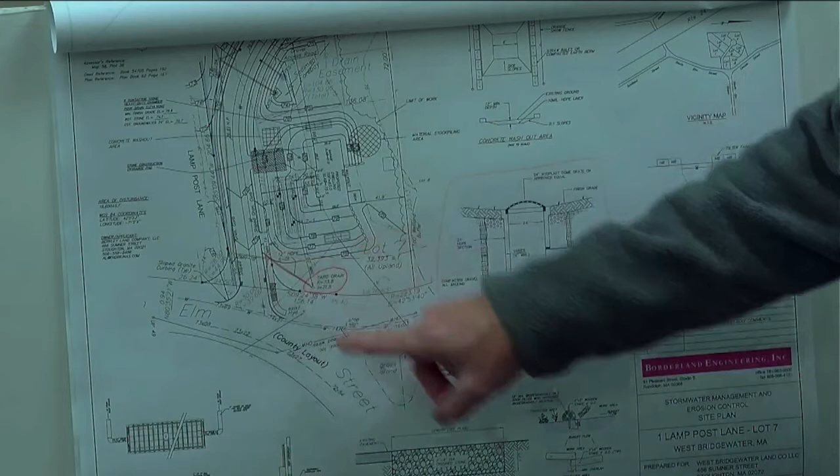The revision we were asked to make at the last meeting was to add a yard drain, which we did, to take care of a low point in the yard towards Elm Street, the hydrant area out there, the existing hydrant, which always collected some standing water during heavy rainstorm events. So we added that yard drain and piped it to the drainage system for the subdivision.

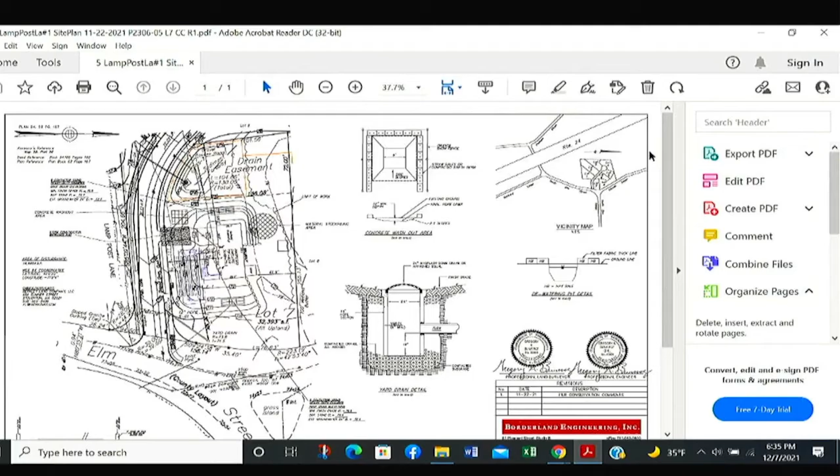In case the audience can't see it, this is the yard drain that they're referring to. That area puddled up, and they've taken care of that now. I think that was it on that one, right?

John, anything to add? No, I'm satisfied. Does that water go down back to the drain easement? Yeah, it eventually makes its way to the drainage easement, through the drain system. Yes, yeah.

Anybody in the audience, questions, comments? Hearing none, I'll entertain a motion to close the hearing. Motion to close, second, moved and seconded. All those in favor? Aye.

I'll entertain a motion to issue a general stormwater management permit for the single-family home for lot 7. I'll make that motion. I'll second. Moved and seconded. All those in favor? Aye. So moved. Then we have number 6.

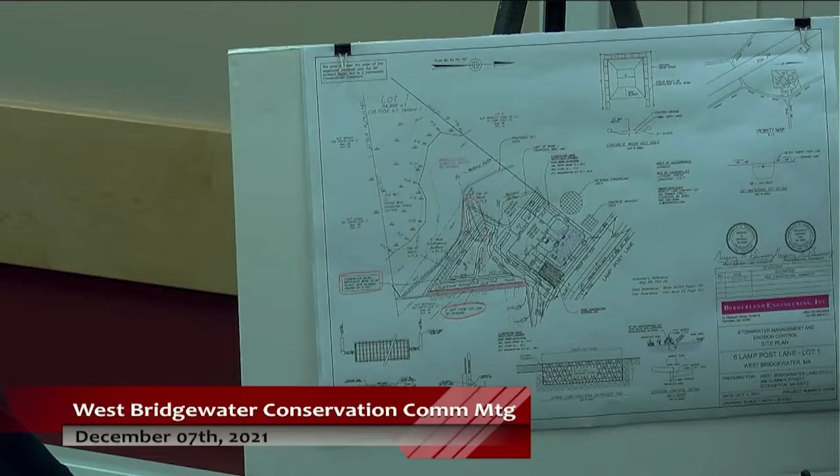John, anything to add? Nothing, I'm satisfied. Any questions, comments from the audience? All right, hearing none, I'll entertain a motion to close the hearing. Motion to close. Second. Moved and seconded, all those in favor? Aye.

So moved. I will entertain a motion to issue a general stormwater management permit for number 6 Lamppost Lane, Lot 1. Make the motion. I'll second. Moved and seconded, all those in favor? Aye. So moved.

And next, we have number 14, Lot 3, Lamppost Lane. Which one are we doing, 14? Okay.

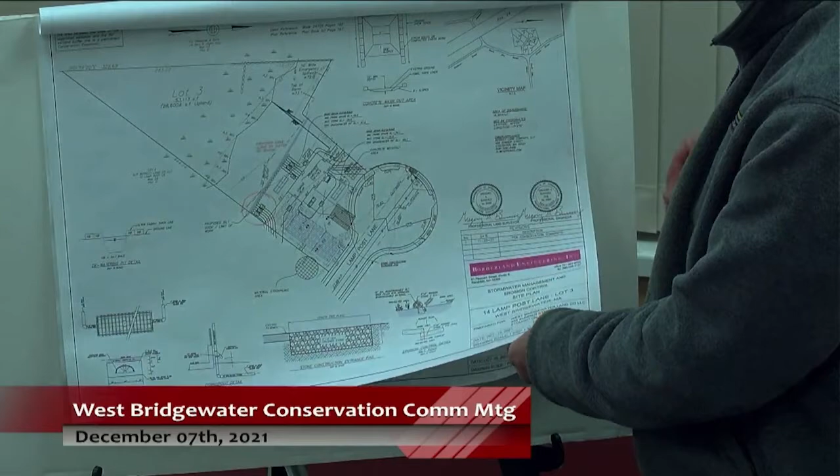John, do we want to go on to 11 Jewel Drive? Or, Evan, are you in the meeting yet? Yes, I'm back. You want to go back to 506? Okay, yep, if 506 is ready, we will. Can you present? Yes, I can. All right, might be easier for you to do it. No problem.

John, do we need the lights off? Go ahead and open the hearing and I'll get this stuff ready. It was opened. Oh, okay, didn't we? Very good. Didn't we already open it? Yes, I think so.

Okay, very good. Well, for the record, it's Evan Watson with W Engineering. I'm representing the applicants, Charlie Macy.

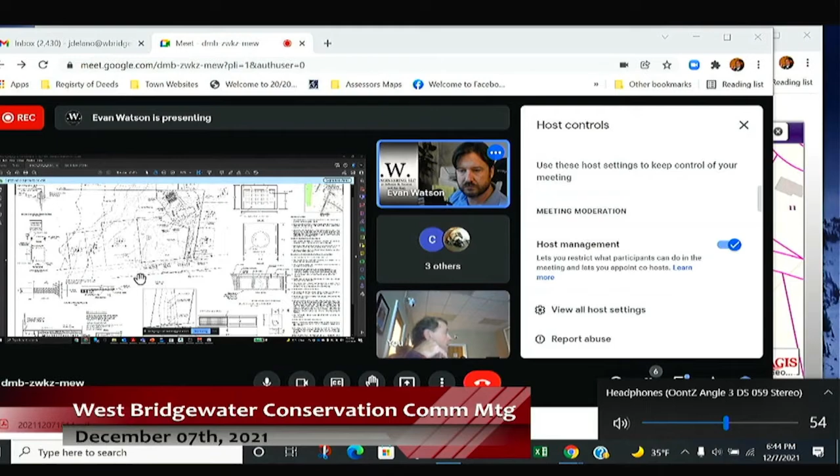I'm going to turn the volume up a little bit. All right, it looks like we're sharing now. Everybody see the plan on the screen? Not very well. Let me try one more thing. Was that better? No. I think if you click the X on the host controls, it might make the screen a little bigger. Like on the big white box that says host controls, there's an X, top right corner. That didn't help very much. Usually there's a full screen mode. Where can we do a full screen? Try the three little dots at the bottom near the hang up button. Yeah, we do have full screen. Can you see that okay? Wait a minute. There we go, a little better. Thank you, that's better. I do a lot of Zoom meetings.

So is that working out? Why do we have these though?

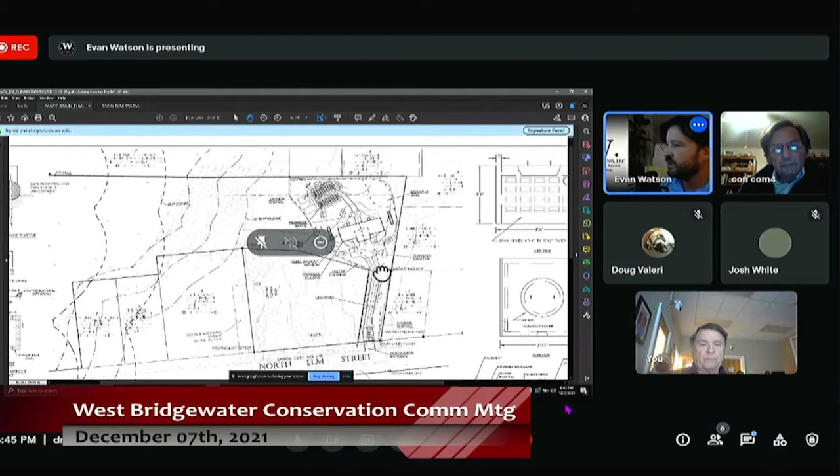We have a proposed duplex and driveway with North Elm Street. The wetland resource area is all the way over to the west, so the entire site is outside of the 100-foot buffer zone. We have a two-family home, each unit with its own septic system in the back, and then a shared driveway coming down to North Elm Street.

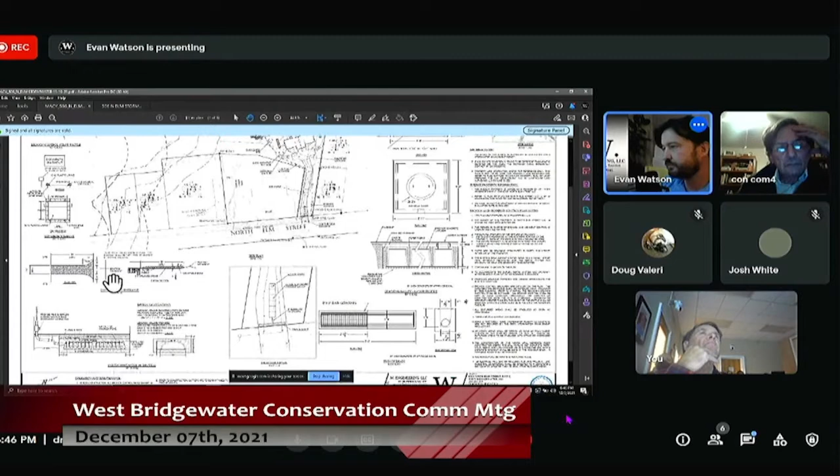We're applying for a stormwater management permit. I'm showing BMPs during construction of some straw wattles, concrete washout bins, and a construction entrance. Post-construction, we have a roof infiltrator with a Cultec 100 drywell, so each side will get drywell. For the driveway, we didn't have too much room on this lot, so we went with a trench drain across the front and leaching galleys underneath the driveway. I presented drainage calculations showing the piping, and the storm I used was the 50-year, one-day storm, as in your regs.

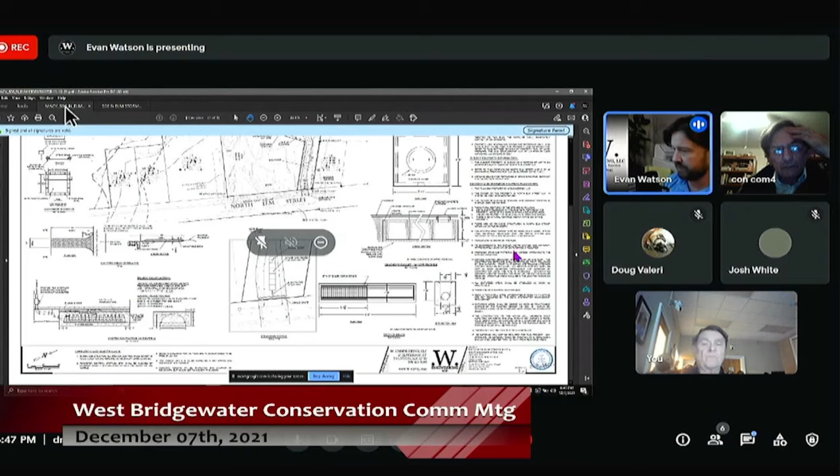I'd be happy to answer any questions if anybody has any.

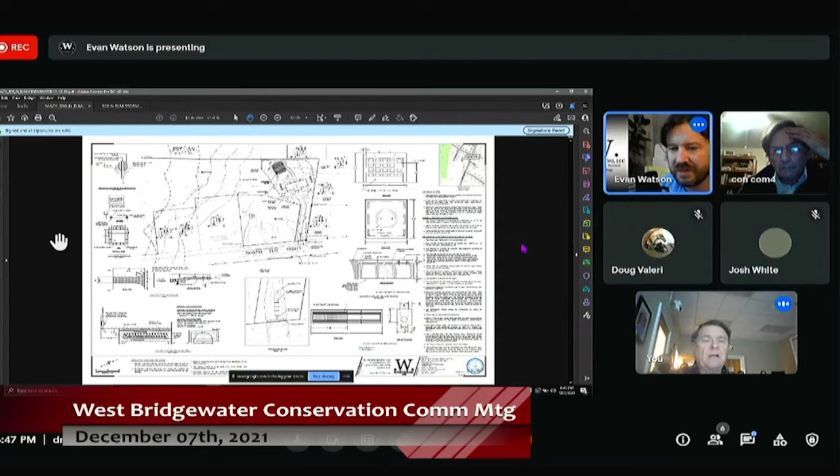Wait a minute. I got it. How do I minimize this thing? Press escape on your keyboard. There you go, thank you. You're welcome, you're hired, can you come every Tuesday? Up at the top, other way. Oh, it's number one, we skipped it. Second one down, third one down. There it is, okay.

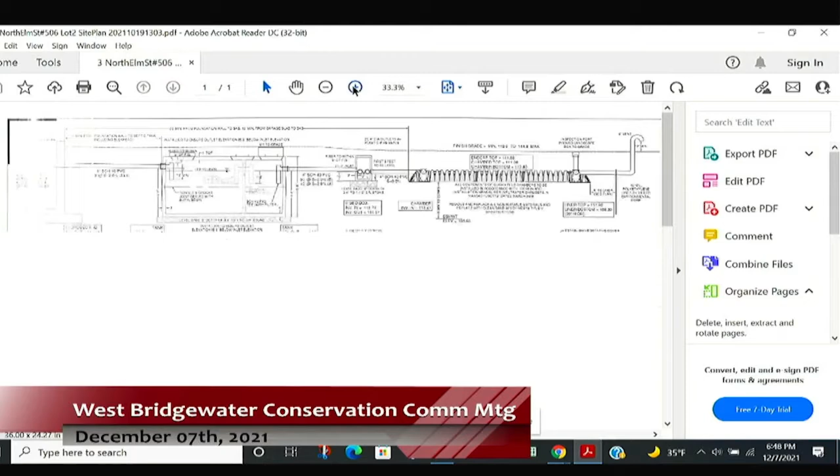Boy, that's not very good either. It's a little better. There you go, can you see it all right? Well, as good as we'll get it. Maybe another one, there we go. Yeah, that was the septic plan before we filed for the stormwater permit.

I reviewed the filing, and he's met all the requirements, has shown all the required BMPs. This plan has a trench drain that will prevent water from coming out onto North Elm Street and impacting the town's drainage system. It'll go underground underneath the driveway, and he's sized it to handle the flow generated by the driveway. So I think he's met all the requirements, but if any abutters have concerns, between Evan and I, we might be able to explain them.

Commissioners, any questions? On the 50-year flood, was it one day, whatever? What's the difference if it was a 100-year flood? Can you hear that, Evan? So could you repeat the question for me? What would it be if it was a 100-year flood? What would you have to do to change it?

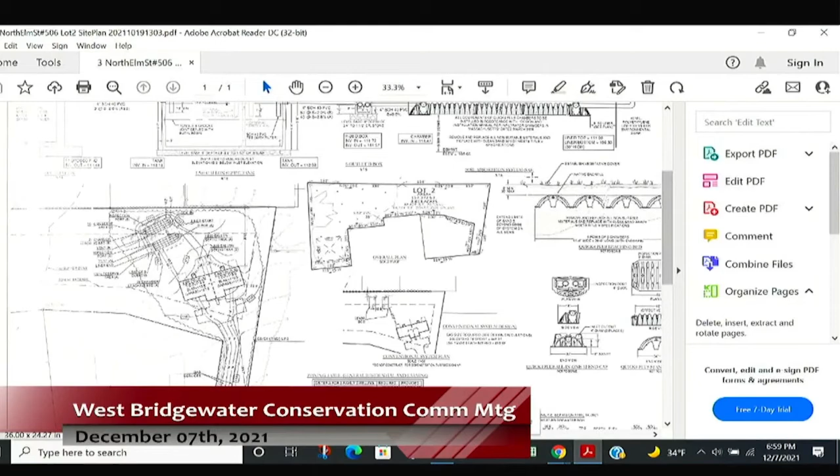And the use of a two-family home is also allowed under zoning as a by-right use, so there's no abutter notification required. And as you just mentioned, there's no work within a regulated area within 100 feet of any resource area, so we do not have to file for any abutter notification.

Which, if you think about it, is a good thing - we're not doing larger subdivisions of the property, we're not in areas that are going to impact other people by being too close to the wetlands. It was only the stormwater regulation that asked us to notify of this.

Is that clear? Well, yeah, but it looks like he's 23 feet off the edge of the back of my property, right there. I'm on 10 Brooks Place. So you'd be up in the back here? Yeah, am I looking at this correctly? That's where the septic is, yeah.

So this is the overall plan, where you have North Elm Street through here. Their frontage that they qualified under the zoning is down here, and their driveway is up here. So the planning board approved this lot, as Evan said, as a Form A, which doesn't require abutter notification.

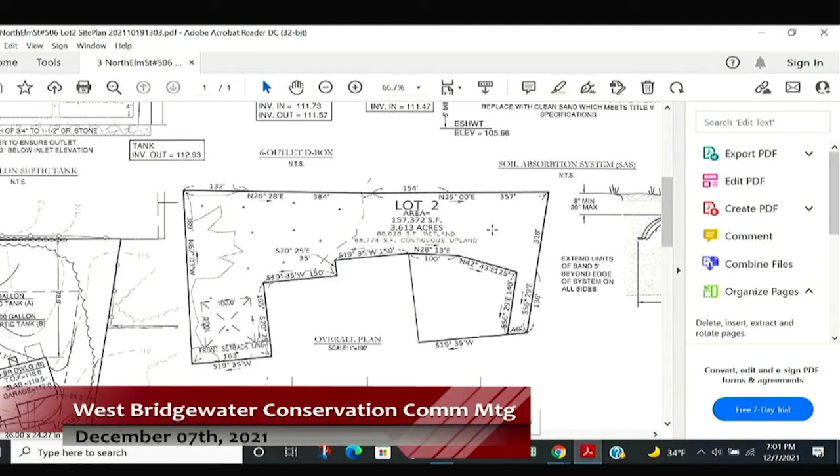Right, but that's water over the dam, they've already approved it. But somebody in town should petition to change that so people can't use wetlands as their frontage and come in from a different direction. I'll shut up about that because it's not conservation, it just happens to be a pet peeve of mine.

But I would say putting a building square in the middle of a wetland wouldn't get passed, also wouldn't be a smart move. You wouldn't be able to do it - it's a non-buildable square. That's the building square right there, and this can't be built.

So you must have this one - is that yours? Right here? So you're the one with the fence over on this other side? Yes. So you're the 23.3 feet from the corner of the foundation to your property line, yeah. The zoning setback is actually 20 feet, so that house could technically be 20 feet away from the property line and still meet zoning.

That's terrible. What about on the actual driveway and 516, because what's the difference, how much space is there between the driveways? It's gotta be like 3 feet, if that. So 516 is here, isn't it? Yeah, so their driveway going up, it's literally like 3 trees' worth, it's so small.

And to have traffic for two families going up and down - the kids, whoever owns that house does not have a big yard, so my kids are in the driveway all the time. To have cars coming in and out, and if that's the only way in, because you can't use the frontage on the other side, they're gonna be - I mean, that's real narrow.

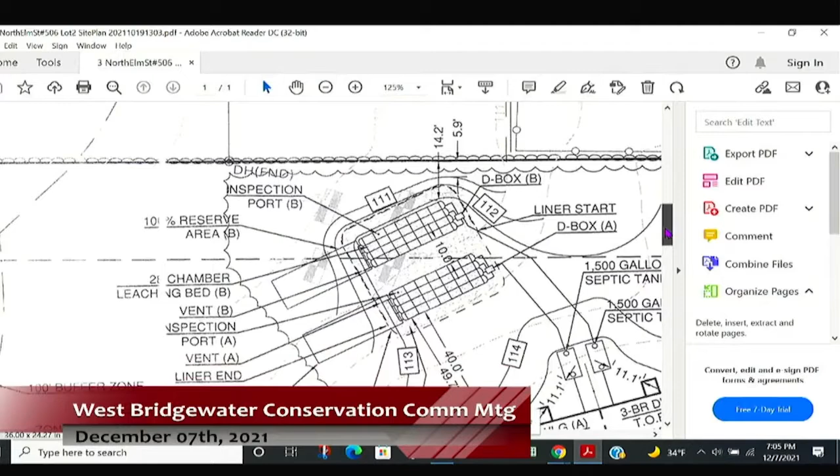Yeah, there's a stone wall there, I think, through the woods. There's an old historic rock wall that we're obviously concerned about something happening to it.

Any other questions or comments on it? At least we can answer some things here. We can get you answers, but we can't necessarily solve the water problem. Hopefully we helped a little bit with going back to putting the drain at the front. For stormwater, you said at the gas line, that's the high point, and it's going to be flowing out to the street.

From that high point flowing back, where does that water go? What's he going to do with all that water, towards the house? Where's that going to go, besides in my backyard?

Yeah, I can describe that. So you can see there's a little low point in the driveway right before the garage, and then it goes around the house, and then the existing topography goes from 118, and it goes towards the left, towards the wetlands. So the soil here is very sandy, we have very good perc rates on this site. So as such, if you have stormwater flowing across grass and woodsy areas, it does a really good job of infiltrating it, especially if you have at least 50 feet for it to go across.

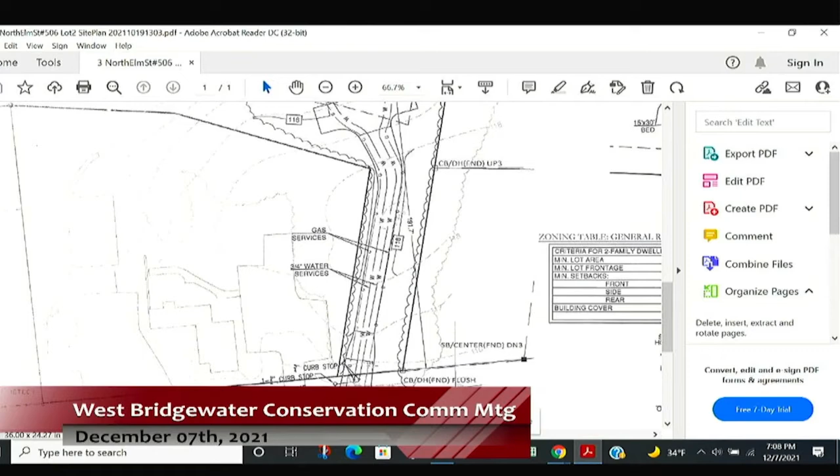You can tell that's 118 here, in the middle. The high point is right in here, 18, 17, 16, so he's got to handle the paved runoff from the paved driveway so that it gets into the trench drain. That should pretty much take care of any concerns about ponding or anything like that.

I think, as Lee indicates, by his requesting this, it should address some of the problems that may have been there in the past. If not, hopefully it'll help a little bit more. One other question - the roof ponding runoff.

It's there now, so it's like, what are you gonna do, right? Well, my house is 10 Brooks Place, like I said before, and we're the highest in the neighborhood, me and this cluster of people here. So we don't have wet basements, and now you're changing everything, and we're gonna have wet basements possibly, you know what I mean? Because everybody around us...

If you look at the contours, by right the engineer said it shouldn't affect you. Well, but we will be affected. We're to the rear and to the left. So what you just said is that all the rainwater is going to go back behind their house, which is where our house is. Yeah, potentially.

22, goes 14, 13, 12, 11. On this plan, I don't know exactly what north is, but it goes from right to left. So that stone wall, I expect that would actually make a little barrier there. We didn't grade up to the stone wall for the main purpose to let our stormwater go around the septic system and head towards the wetland where it's going right now.

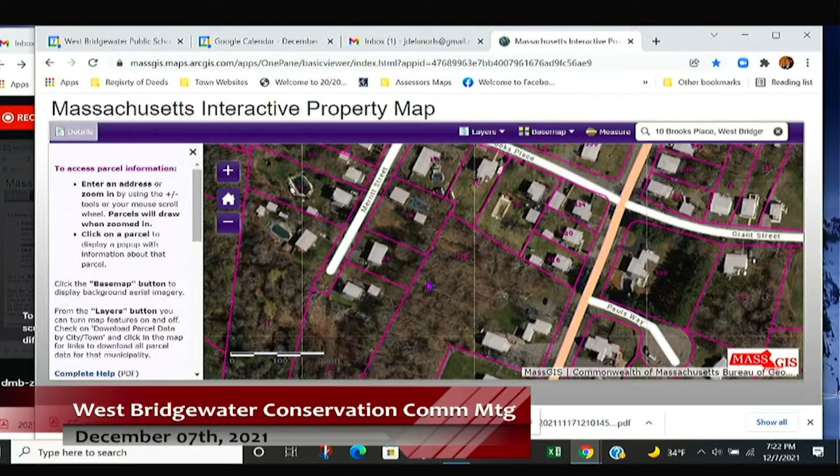I had a question, if we're going to revise the plan to increase the size to the 100-year storm, that could be done with staff, John could take a look at that and make sure it was okay, and that could be approved, and we could have the permit conditionally approved tonight instead of having to come back in January. So I stand corrected, you're right, we are asking for a change and we can't really do it outside of a public hearing.

Great, okay, so it's a continuance. Entertain a motion to continue? I'll make the motion. Moved and seconded. All those in favor? Aye. So moved. Lee, did you do the second? Yeah.

All right, you're continued to the next one. If the audience wants to come in and see what they've done to make the change, feel free to do so, always welcome. Will we get another certified letter? No. So it'll be on the 21st at 6:30.

This is just so horribly upsetting. We all bought our houses knowing what was around us and decided on our houses based on that. And this is upsetting every single one of our lives, drastically. Happened to me, not in this town, but in another town, same thing.

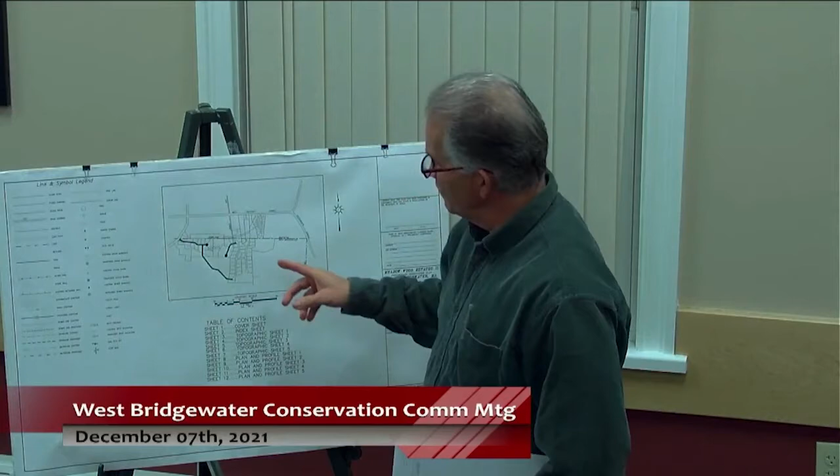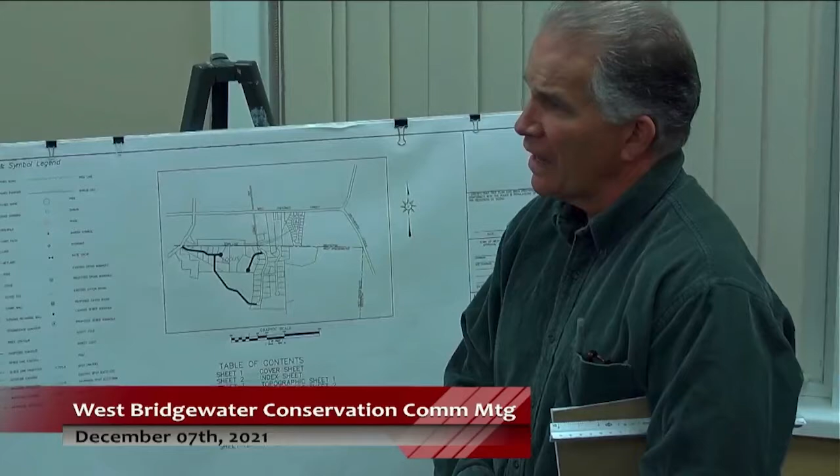So what we have is a preliminary subdivision we filed recently with the planning board. We haven't had a meeting with them yet. This preliminary subdivision comes in off of Walnut Street, pretty much right at the town line. You can see it in the upper left-hand corner of the plan.

It's not off West Chestnut? It's not off of West—that's Chestnut. Is that gone? Well, no, that's not going. It's sort of in a state of flux, I guess. So this is where they were gonna be coming in before, and over here. So there's two entrances, one on the north side. Okay.

So we come in off of Walnut Street, you can see right there, and we pretty quickly hit a wetland area right there. That's an area we'd be asking for a fill and replication. It's all BVW, but it's under the 5,000 square foot requirement. We don't show any replication area yet, but we could certainly replicate 2-to-1 versus what we're filling in, and we're proposing a cross culvert underneath the road. So that's one area where we'd have actual filling.

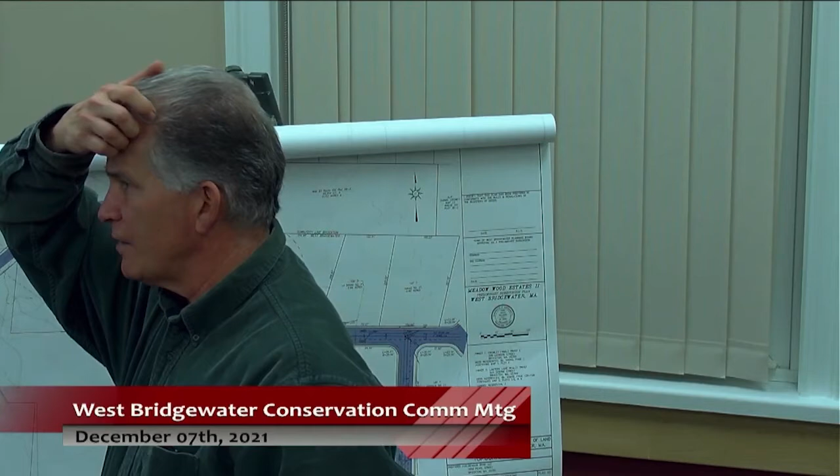Looking at some of the other lots, we'd have buffer zone work on several of them, but we haven't shown anything there yet. If you look, from that initial cul-de-sac we have another roadway that turns and goes south, and that crosses onto land owned by Crowley. It's about 26 acres, and that wetland line has been established.

They filed an ANRAD and it's still current. But when you cross to the south, you cross onto property owned by Millette. He's done a fair amount of work on that property—he's had a wetland delineated and a top of bank delineated for that brook—but he hasn't filed an ANRAD yet. We'd certainly do that prior to filing any notice of intent with you.

If you look at this road that comes from the south and runs southerly, it runs along a high tension line easement, then breaks to the east and crosses the brook right there. So we'd have wetland filling, work within the buffer zones, and work within the riparian zones to make that crossing. We tried to pick a spot that was as narrow a wetland area as we could get, to minimize the impact.

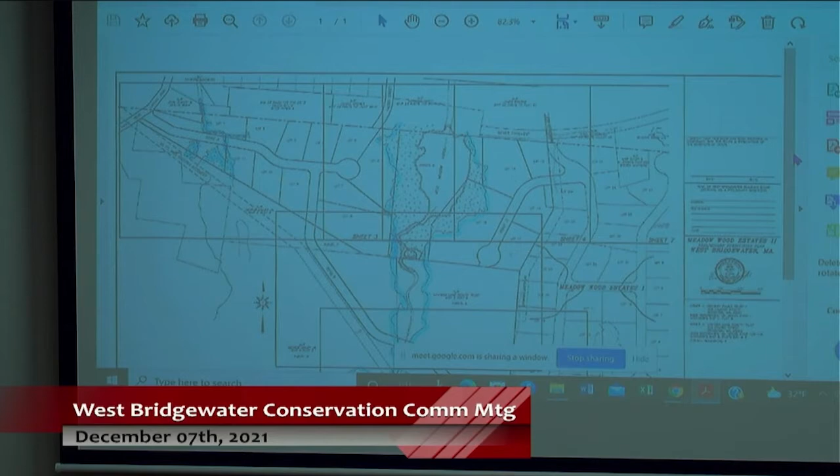So we're looking for another alternative, which would be putting all the traffic onto Walnut Street and back out to West Chestnut. The other alternative was to come here and go over the wetlands to make the connection. So if they said no up there, you guys wouldn't be able to do it down here—couldn't make a connection to come in at all. That's with the water main and everything?

The water main might be coming from your water tower up the street. I guess what you're saying is if our West Chestnut Street access was eliminated and we were denied a wetland crossing here, I don't think there's another way to really get to the upland portion of this property. How many proposed homes?

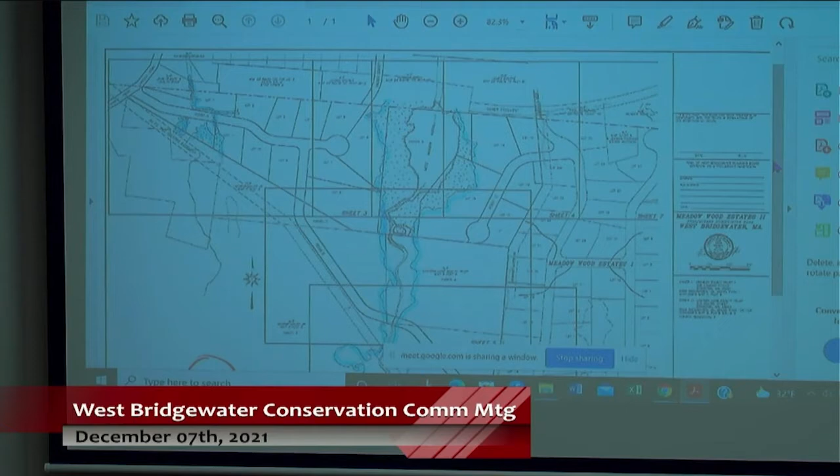If we looked at just that first section without the part that goes down to the south, it's probably feasible, as long as the commission does say it's okay to cross the wetlands and infringe on the buffers as a limited project. But you've got to give mitigation, and the commission can decide what that mitigation would be.

Does the state say it's okay to cross for limited access for a certain reason, like to get to your property, or is it saying you can go into it but also create a subdivision in there? Yes, they allow that you could put a subdivision in there. Even though it's limited access? Yeah, and then that's up to us. Now, that would be if the Crowleys came in instead of these developers. That's how Crowley could probably get it.

A joint venture, well, that's the only way we can do it. Here's where it starts to become an issue. You've already crossed the wetlands under a limited project - that's not now considered a limited project anymore. So they're going to be encroaching in the 200-foot and 100-foot riparian on both sides of the stream. They're going to be encroaching on the 50-foot buffer. They're going to be doing something in the wetlands.

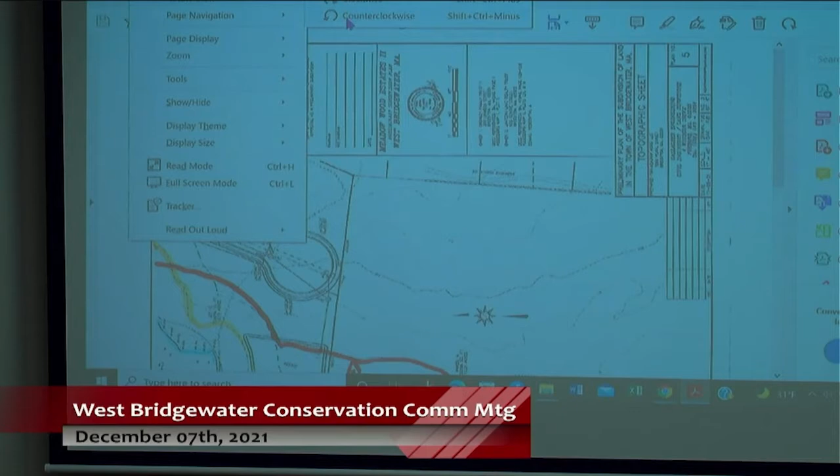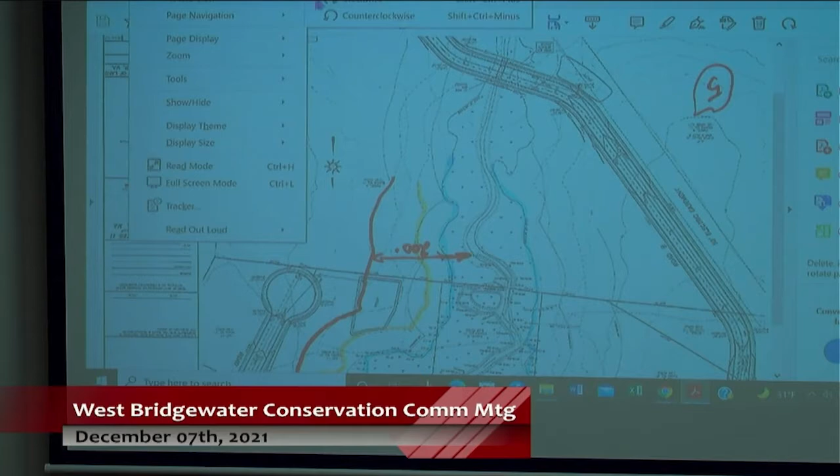So I think, as you said Mo, a lot of it's the piece in the middle, that unknown.

Can I say something, please? If we didn't build the road, we stopped at Crowley's property, we'd just have to run the water main if we get the water from West Bridgewater. The other, George Millette, can file later or do what he wants with that piece. We would just run the water main where the road is proposed to get it onto our property, to Meadow Wood. So our traffic would go out onto West Chestnut Street if we get the water from you. So this would be the path of the water.

This would be the path of your water main, yes. So you still gotta cross there, but with less impact because we're only gonna run the water main, and if it's elevated, we can insulate it. And then you can bridge it right over it, and without even interrupting the stream, you could set all that with a crane.

But you'd need to build a roadway out there, just not with all the utilities. Right, and the other utilities will all come through Brockton, the power and gas, same as down there. But the water pipe there where the hydrant is, I was told, is only a 2-inch water pipe. But it would benefit the entire town for us to bring the water main down the street.

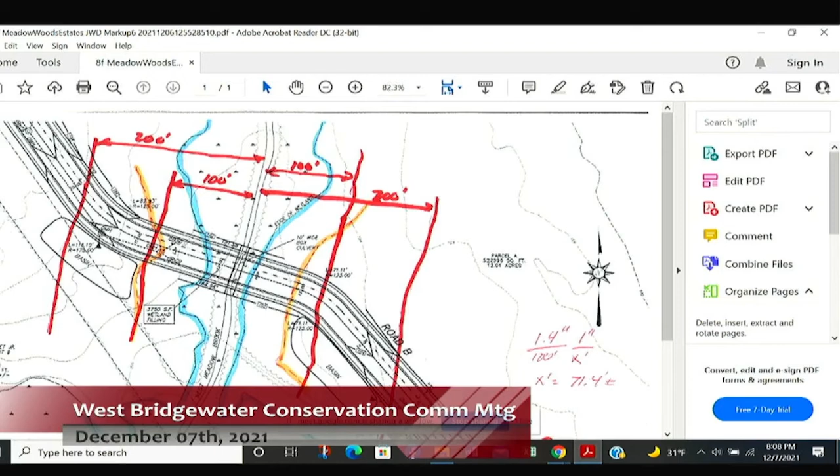As a roadway crossing, the culvert system here would probably have to be upgraded to some type of a bridge or arch, to even satisfy DEP. It may not satisfy this commission, but I think if DEP got involved, they would probably want this bridged so that you were not impacting any of this blue at all, so that there was a sufficient span and height so that the riparian zone could be somewhat functional.

The commission itself uses the 50-foot buffer as a no-touch, and so that's the yellow lines, and the riparian zones are the 100 and the 200 on both sides, and you can only disturb 10% of the riverfront area in the outer 100, which is this section in here and this section in here. So it might not even pass that particular standard in the Rivers Act requirements.

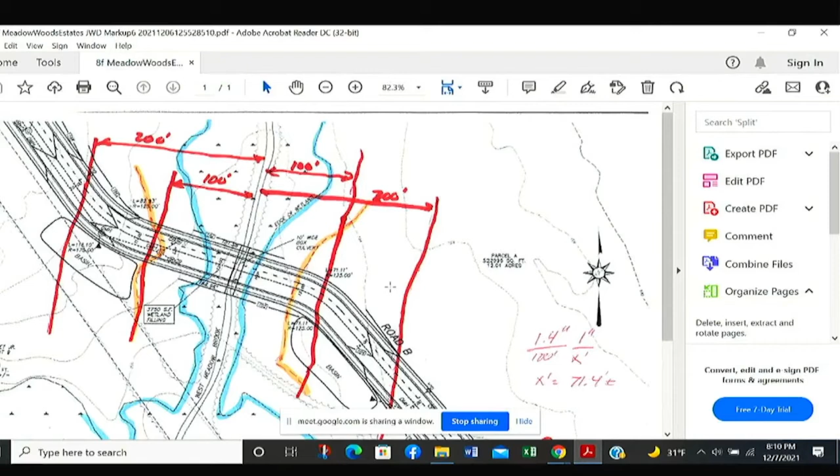So doing a water main crossing you might be able to get that approved. I'm not speaking for the commission, but you might be able to get that approved because there's a lot less impact. But you know that George would wanna come in later on with something and have to face the same problem.

No, because we don't wanna see it segmented, where you do this section and you get a crossing, and then George comes in and says, well, I'm taking off from, let's call it the Crowley Road, and I'm gonna cross here, so it's only one crossing. When you take the overall concept, you can't segment it into groups and then take advantage of it.

It would have to be - well, his project would be completely separate from anything. All we have from him is an easement. And whatever he does is something entirely different, and it's different ownership.

So, John, don't you think that if George Millette came in, if we ended our road at his northern boundary, he could come in that side - we'd have to give him access, I think the planning board would want that. And if he came in as a separate applicant with a separate project, wouldn't he have a legitimate case then to say, well, you guys have to give me this one crossing, because otherwise you're denying me the highest use of my property?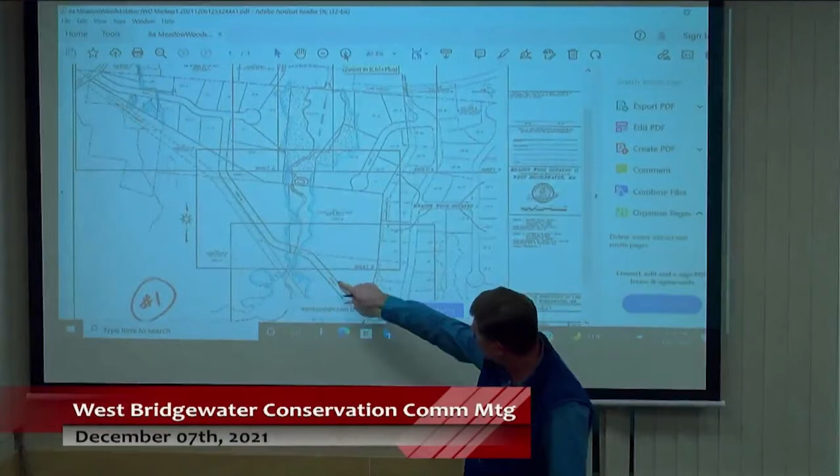There's no wetlands over there. Right, but on your plan right now the road goes down to here, and there's another wetland area. I'm just trying to get it as far away from the wetland area as possible for you to get your access — you need to cross right there.

You're still going to have to cross, but if you cross here with your water main — Frank said that way could work too, since it's feasible for future development in there. You guys are looking for the easiest way to get it, but they're also trying to stay furthest away and look at the future too.

Is this a wetland? No, right there — yeah, this area here that we had, that's wetland. And that little finger that goes up, the dotted line, a little to your right — yeah, that's wetland too. And then you have some wetland on the right-hand side that we talked about before, George.

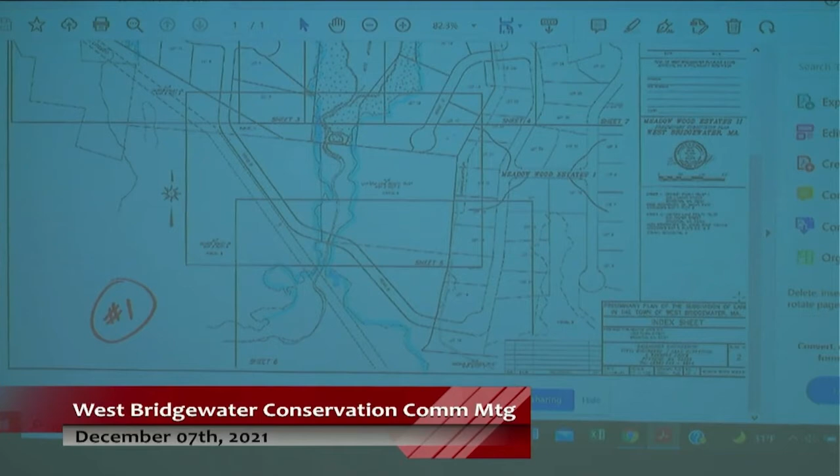So this area here — these three, yes, okay, and then to the right. Could it possibly go higher, to the north? Well, we could go up there, but it's much wider. No, what he meant is where the straight crossing is — just bring it there. Yeah, we can do that.

I was just trying to keep you from having to disturb the least amount of wetland area as you can, with a 50-foot no-touch zone, and keep it out.

Where would it come in if it was water from West Bridgewater? The main would come up off of Walnut Street, all the way to the Brockton line, because that's where Crowley's property is, literally on the line, and we'd come in through there with the water main.

It's going to roughly cost $500,000 to run the pipe up — easy, yeah, or more — with restoration of the people's yards and everything. So if you did that, would it be worth doing?

$500,000 doing that? So you guys, nowadays, that's one house. No wonder why you have no problem doing it, because in this business, some people say...

I do the work myself. No, I understand, but it seems like the numbers are ridiculous now. I'm not even thinking about that. You've seen the house prices lately, they're crazy.

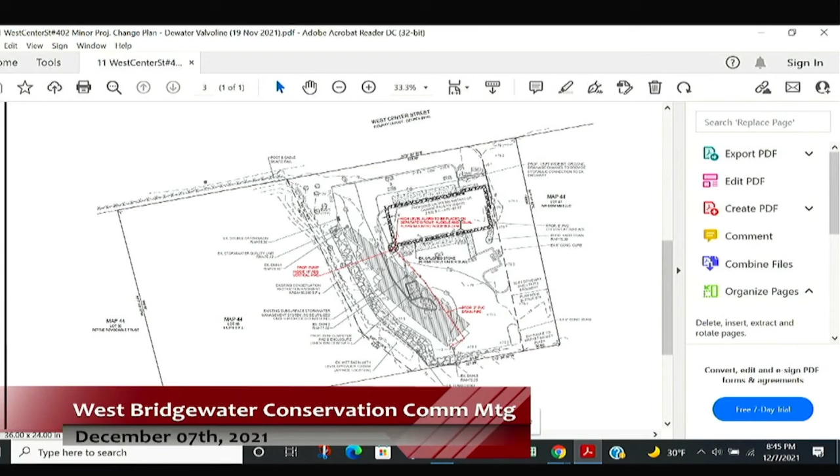Alright, so this one is, of course, the Valvoline, and they're going to be coming in for a certificate of compliance, probably at the next meeting. But before they come in with it, the commission has to decide whether they installed a dewatering pump system to make sure water didn't come up into the basement of this facility. So they put crushed stone all around the footing of the building at the time of construction and had a temporary pump system, and decided maybe it's best that they keep it going all the time.

Don't they have to have that all the time? Well, I guess they don't have it in the other stores sometimes. I guess it depends on the area you're in. Yeah, if they don't want to do it, then that's their problem, to a point.

And that's a project change because it wasn't approved on the original plan. So they have proposed, and they weren't discharging it to the stormwater underground system. Originally it was just going off into the stormwater basin area here. They are going to pump it over to the manhole at the beginning of the stormwater system and run it through, and it exits here and goes into the wetlands. So it's really just groundwater, it's clean.

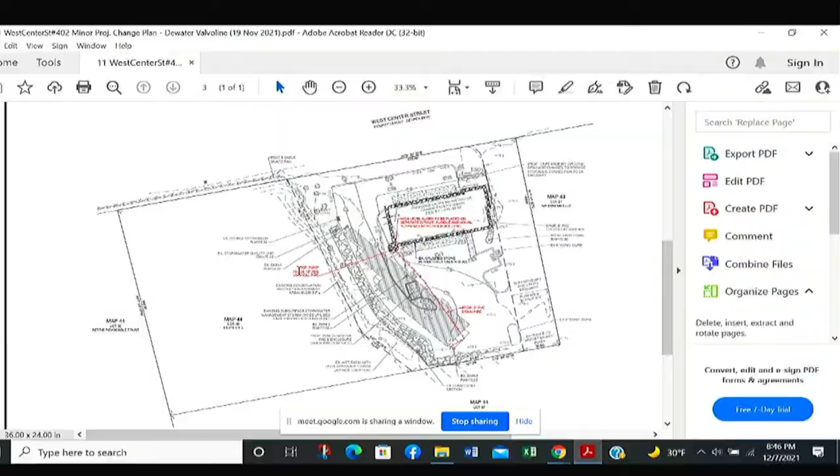When they come in for their certificate of compliance, I'll be doing an inspection to make sure there's no interconnection to this footing drain that they put in. Otherwise, if they had a spill inside, it could contaminate. As long as they don't have any inside connection to the outside, then I don't see an issue with this. And if they did, I wouldn't recommend the COC. So we'll see how that comes out when we do the inspection.

But I recommend that this is a minor project change. I'll make a motion. Second. Moved and seconded, all those in favor? Aye. So moved.

63 Maple Street, request for a minor project change followed by a certificate of compliance. You're still with us, Josh?

Still here. Do you think you can share? Got his pajamas on now. Yeah, I'll throw up the plan right now. Okay. This is classy.

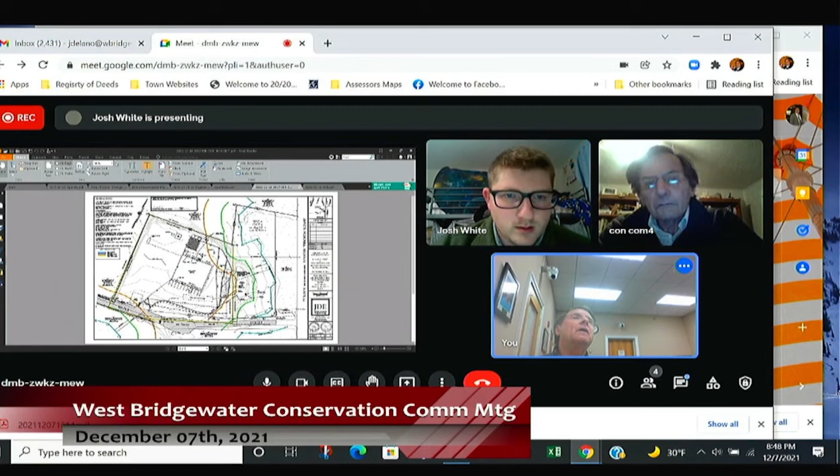Alright, can you guys see my screen? I don't know why we're having issues with this. Let me see if there's any setting. Yeah, what we're seeing is a very difficult to read screen. We didn't have this problem with Zoom, did we? Josh, if you go down to the three dots, the bottom one, and hit share entire screen, that should work. Share now? No, go down to the three dots, isn't that what that lady did? Oh yeah, that's what it says. I may have messed you up there, Josh. Full screen. Full screen. Oh, okay, well we'll get full screen.

Yeah, now we can share, and I think it'll work. Oh, there we go. There we go, that's better. Yeah, that's better. Alright, cool.

Alright, so first we're here for a minor project on 63 Maple Street. Basically what happened was the applicant went to the planning board for a modification of the site plan, to basically put up some barriers to separate the site and the nearest residential zone, which, as I can show on the plan, is across Route 24.

So basically, they installed some barriers on the site to prevent cars or anybody from entering.

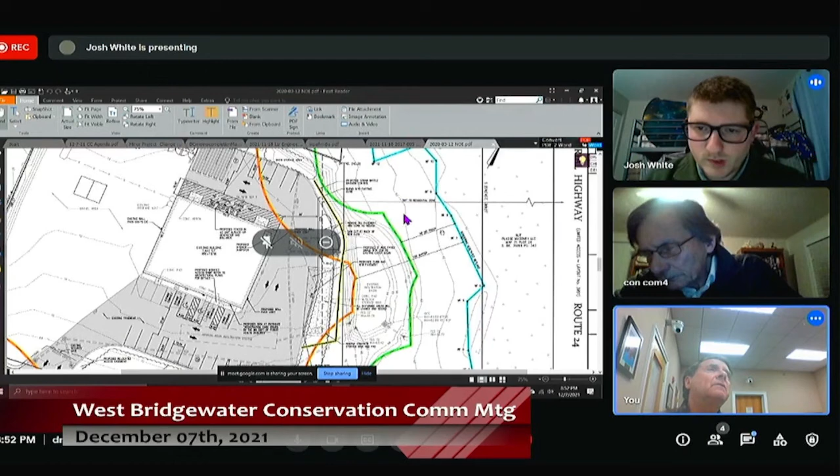I didn't know that. So they proposed this plan showing how they were gonna take anything that had to do with the facility out of that 500-foot buffer. It had really no impact on our decision because it was all existing.

And because they were gonna be doing some alterations, it required the filing of the notice of intent because it was within 100 feet of the wetland.

Now they're not going to do that because the planning board allowed them to just put up a barrier. So they really made no changes to the site, and it makes the original decision more or less moot at this point.

So what I'm recommending is that it's a minor change, that they just put up these barriers to prevent any activity occurring related to this facility within 500 feet of the abutters.

And if you approve the minor project change, the next item on the agenda is to issue a certificate of compliance that they complied with the original plan.

I'll entertain a motion for a minor project change. I'll make that. I'll second. Moved and seconded, all those in favor? Aye. So moved.